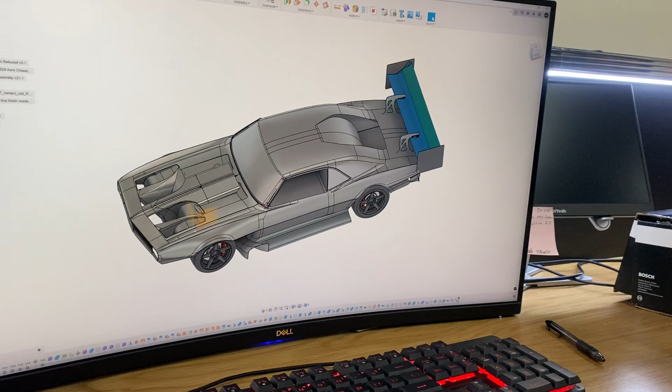So this is not my work. The ducting is actually designed by Robin Shute. He's been helping us out on this. So you can kind of look in here and you can see the duct. This is the bottom side. This square part down here, that'll be the radiator.

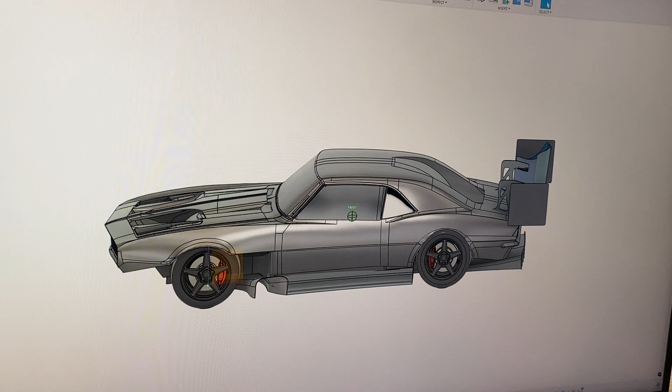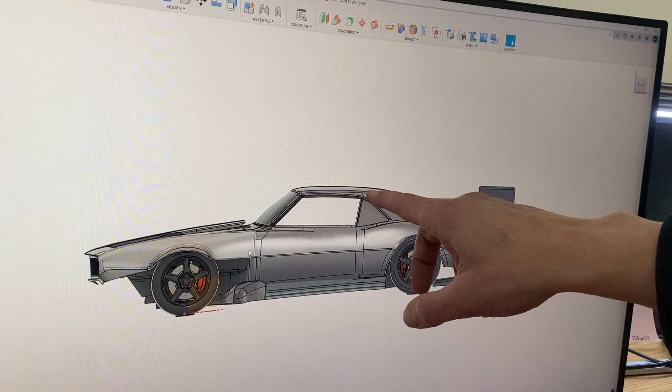We're trying to get a nice smooth airflow going into it that doesn't disrupt the wing, because one of the big things we're concerned with is you've got a bunch of air coming over the top of the windshield here, and you tend to get some detached flow and a little bit of turbulence up here. It actually generates a little bit of lift. So we're trying to get this duct where the air reattaches to the roof and it can follow into the duct. We won't know for sure until we test it out, but this was Robin's idea.

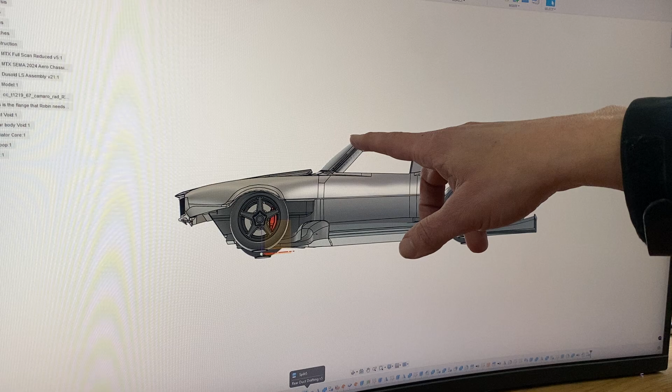So here's the top part of the scoop. If you look at it in the side view, we're trying to keep it really smooth. It's very low profile so that when the air comes across, it'll be dipping down and then just ever so slightly proud of the roof to catch just a little bit extra air. This highlighted section is showing you what this initial iteration is going to be. We're again going for a nice expansion here because that's going to increase the pressure, and the pressure differential across the cooler is really what's going to help that thing flow and help the car stay cool.

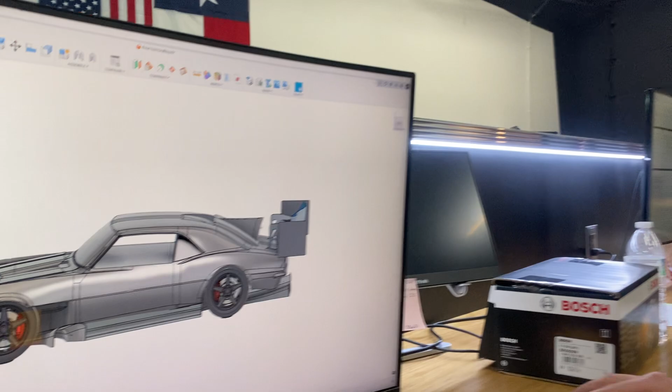And another thing that we decided to play with, I think this was Aaron's idea, is different versions of maybe a shark fin on there, just because we think it looks kind of cool. This one's a little shorter than some of the ones we were playing with, so we're going to see what that does in CFD, see if it's helpful at all or wasteful, and look at it in the model and ask, do we think it's cool? I think it's kind of neat, especially if it was going to be carbon.

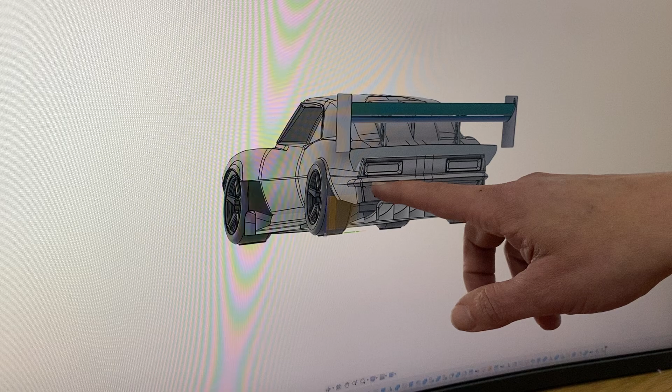So that's where we're at now. The model's all done. The duct is done. We hollowed out the back so we could see. Another question is, we've already got this hollowed out area in the middle. Do we need to make that larger so that we have a little bit more airflow out the back, or is that okay? That's one of the questions we're looking at from the CFD analysis.

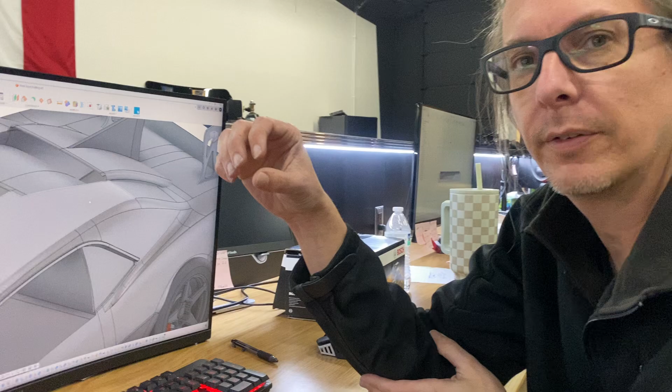Another one is going to be the front edge of this part right here. If you look, this part's actually radiused, like what you would see at the front of an airfoil shape, because we're trying to split the air and make sure that it's not super pitch sensitive and it doesn't create a bunch of dirty air off of it. We're trying to keep attached, smooth airflow along this edge so that the air going into the wing doesn't get disrupted.

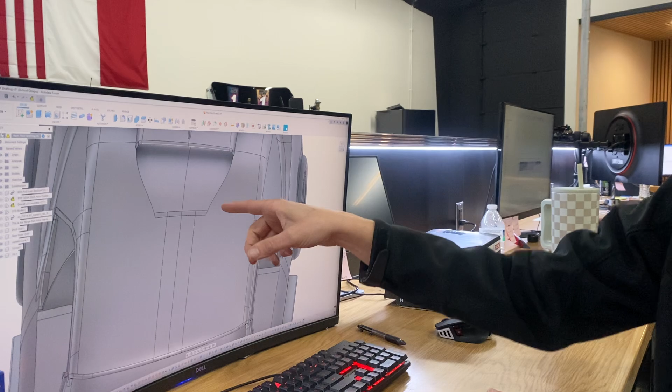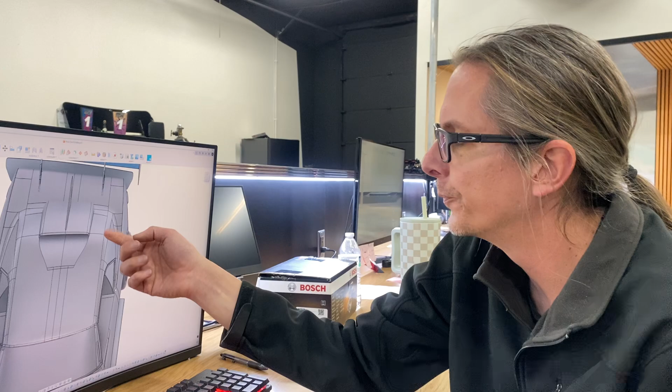So the main CFD questions are going to be, did we nail this shape? Is the entry here the right shape? You might ask, why is this curved like that? Why not just have it be straight? Well, one of the things that NACA ducts do is use this sharp edge as a shedding edge to spin up vortices inside, which is intended to help the boundary layer stay attached on the sides of the duct. So the intention here is to give it a little bit of expansion right away with a sharp shedding edge and see if we can get some vortices going down in there to help with flow attachment.

So we're looking at this edge, we're looking at this edge, we're looking at what happens to the wing, and we're looking at the pressure and mass flow through the radiator core, and the pressure differential across it. All of those questions you could answer by iterating it, putting it together, putting sensors on it, driving it, and seeing how it works.